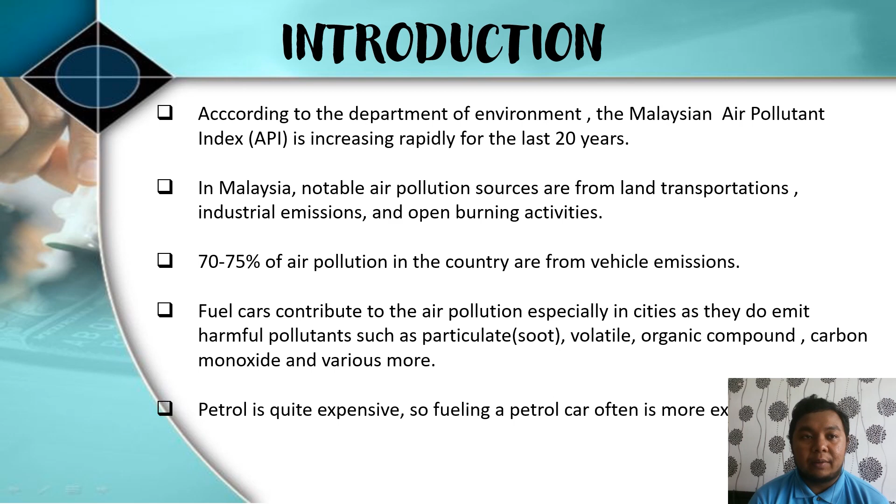Fine particulate soot threatens human health by penetrating into the lungs and will cause lung irritation and weakens our body defense against respiratory diseases such as influenza and COVID-19. Okay, regarding the problems that we faced during our discussion, firstly, we have to determine what type of material is suitable for making our chassis system, which is we have to use the strongest material as the body chassis.

And then the second is, as you all know, conventional three-wheel scooters are not environmental as they use a two-stroke Daihatsu engine and are very noisy in the street or in the cities. And lastly, usually three-wheel scooters with internal combustion engines are not energy efficient as they use fuel, and as fuel is not a green source of energy, that makes them not as efficient. Two-stroke engines emit high soot emission. By converting to electric, there will be no tailpipe emission. Running on electricity will reduce the carbon dioxide emission by 60% compared to running on petrol.

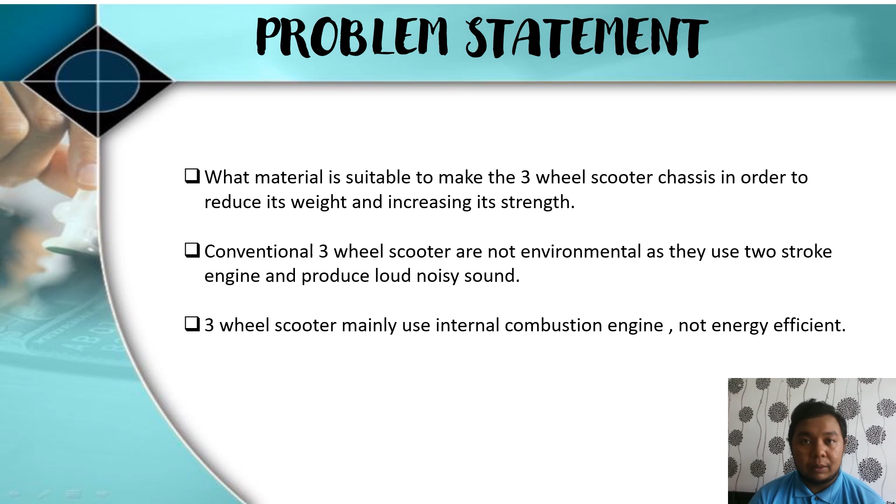Okay, regarding the objectives, firstly, we want to determine the most suitable material used to develop the chassis. We select the best material that can give low cost but high quality. Secondly, we want to design and fabricate a high-quality custom three-wheel electric scooter chassis by joining a go-kart chassis and a motorcycle fork within 14 weeks. And lastly, we want to test the operation of the electric scooter chassis functionally using a brushless motor powered on the road from 0 until 20 km/h. That is our target.

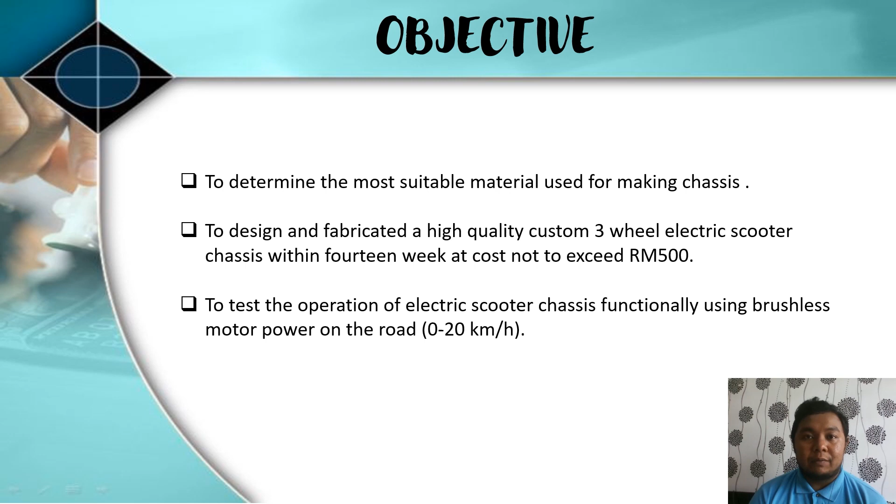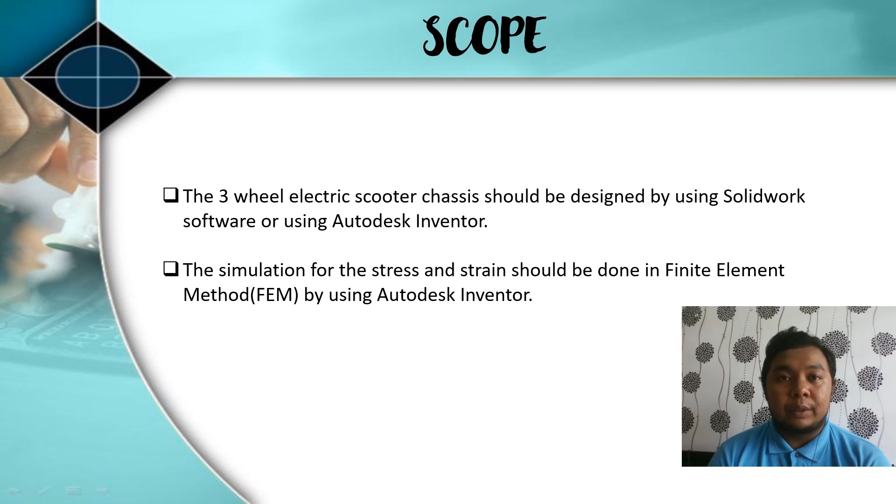And then for the scope of the project, firstly, the three-wheel electric scooter chassis must be designed using SolidWorks software or Autodesk Inventor. Basically, our group has done this part using SolidWorks software, and it will be shown in the sketching later. Next, we will run the simulation for the stress and strain in finite element method (FEM) using Autodesk Inventor, Nastran or SolidWorks. This FEA analysis is important to obtain information on the highest stress and strain on each part of the chassis.

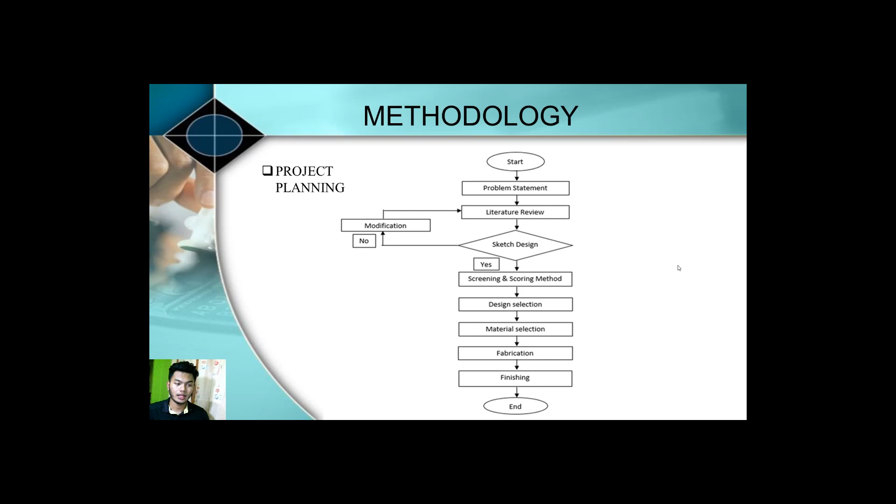For our project, the duration is 14 weeks, and this is the detail of the project. Week 1 we create a group, week 2 we select a title, week 3 we do research on the title, week 4 until week 6 we produce the design ideas, week 5 until week 6 we select a design, and week 6 we discuss the material. At week 6 and week 7 we write the proposal, and at week 8 we present the proposal.

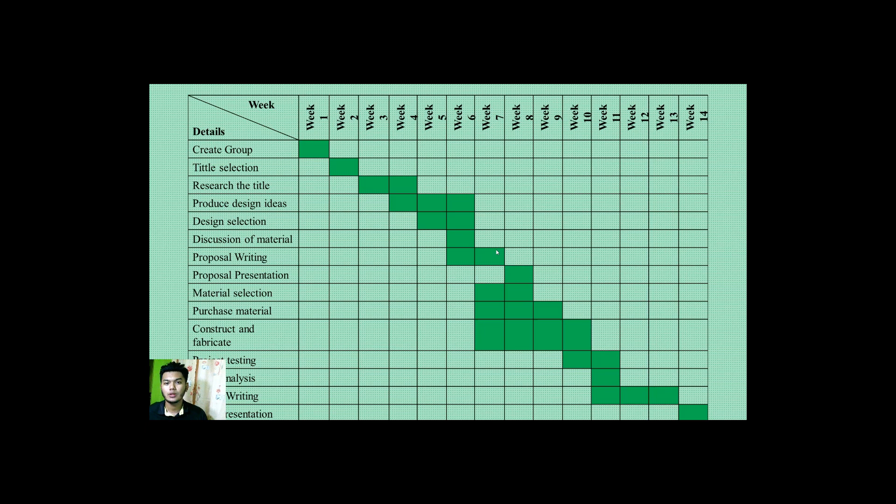At week 7 until week 8 we make a material selection, and week 7 until week 9 we purchase material. Week 7 until week 10 we construct and fabricate the model. Week 10 and week 11 we test the project. Week 11 we make an analysis. Week 11 to week 13 we write the report. At week 14 we do a final presentation.

Okay, next is the motor calculation. For the calculation of the DC motor, the most important value is the motor constant K. K is the combination of the stator size, winding, and the magnetic field. The torque and the angular speed or rotational velocity are related to K. This is the K formula, which is K equals NBLD. N stands for number of turns of wire on each tooth of the stator. B is remnant flux of the magnet. L is length or thickness of the stator. D is the diameter of the stator.

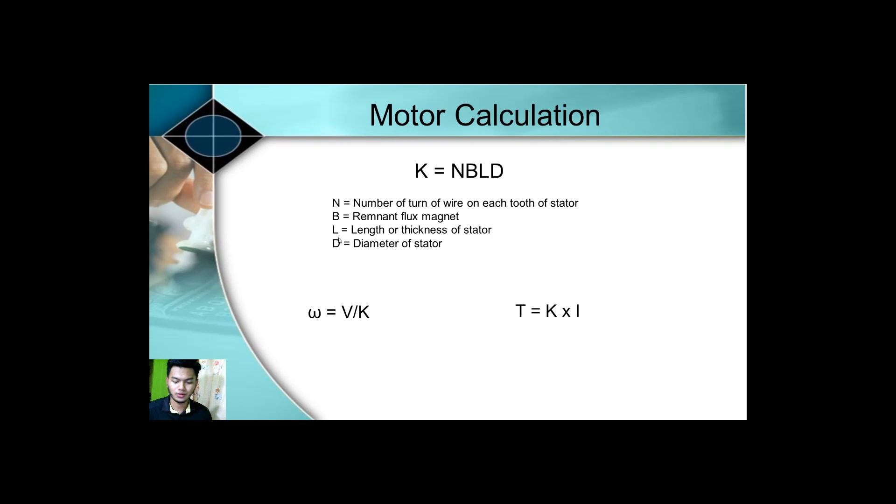After we get the value of K, we use this formula to find the rotational velocity, and then we can find the torque value using this formula: T equals K times I, where I is the current. In this case I can't find the value of NBLD, so we proceed with another calculation. I choose a motor ZY1016 with a power of 350 watt. The speed is 2750 rpm, and the voltage of the motor is 24 volt. Current is 30.5 ampere. The motor weight is 2 kg. So we can use the motor specification to find the angular speed and the torque.

We use the angular speed formula, omega equals speed times 2 pi over 60. So we get the value of 287.98 radian per second. Then we find the torque. Torque is equal to power over angular speed. The power we have here is 350 watt over 287.98 radian per second. So we get this value of the torque.

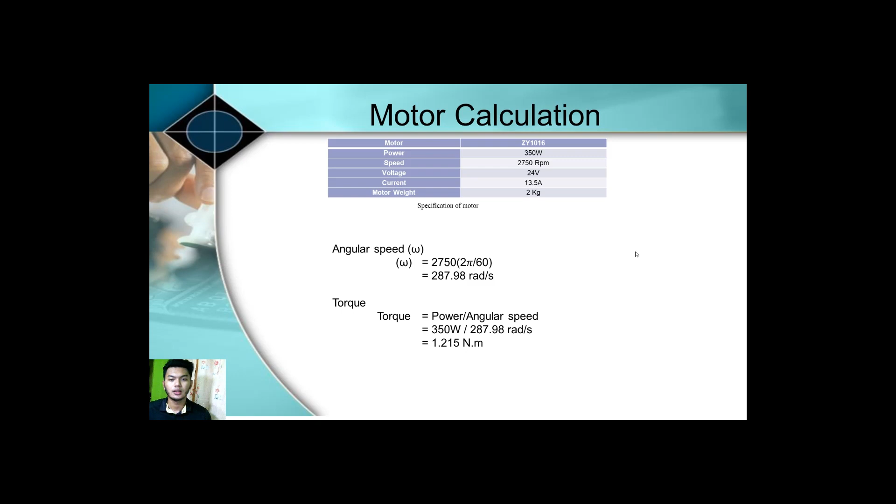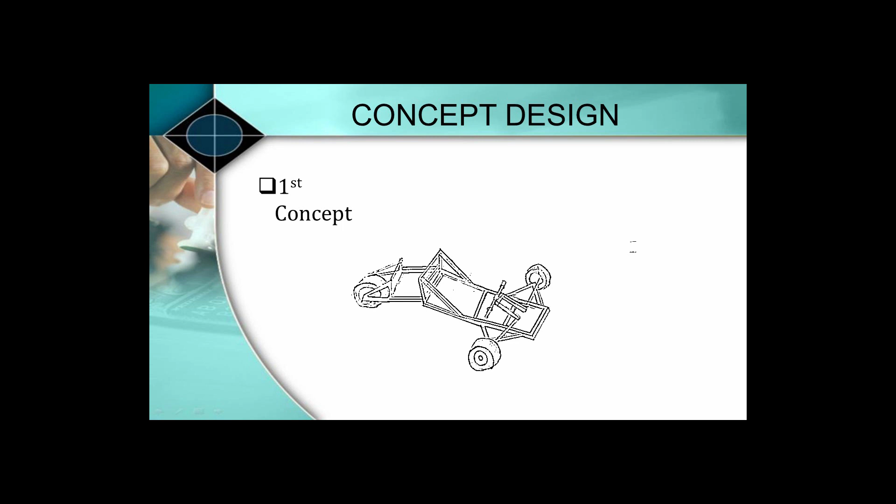The disadvantage of this concept design is it's harder to build because it uses more material. When we use more material, we will use more cost. So this concept design may not be suitable.

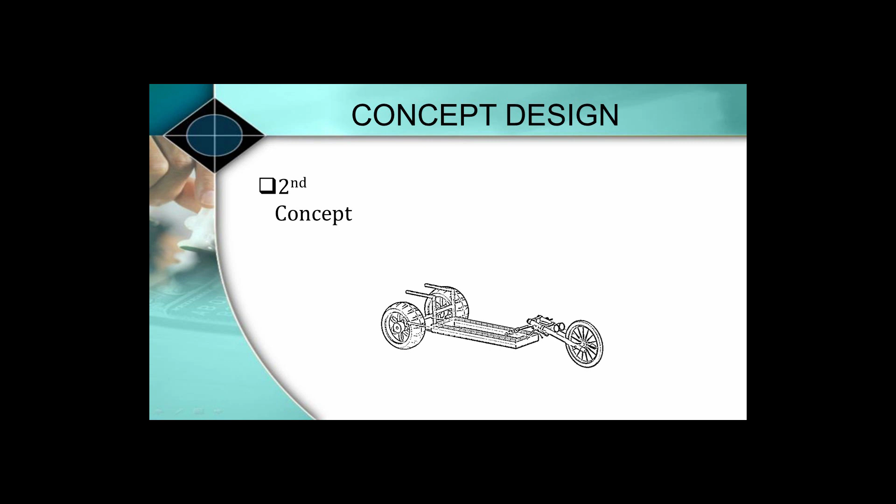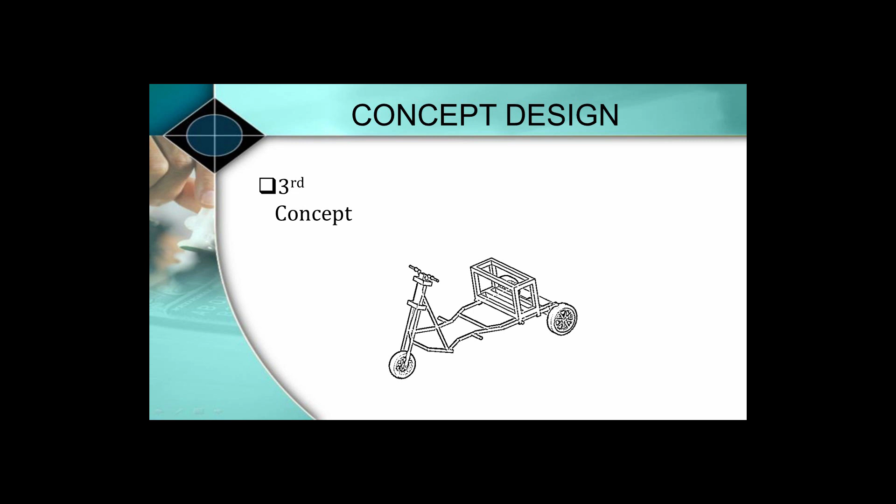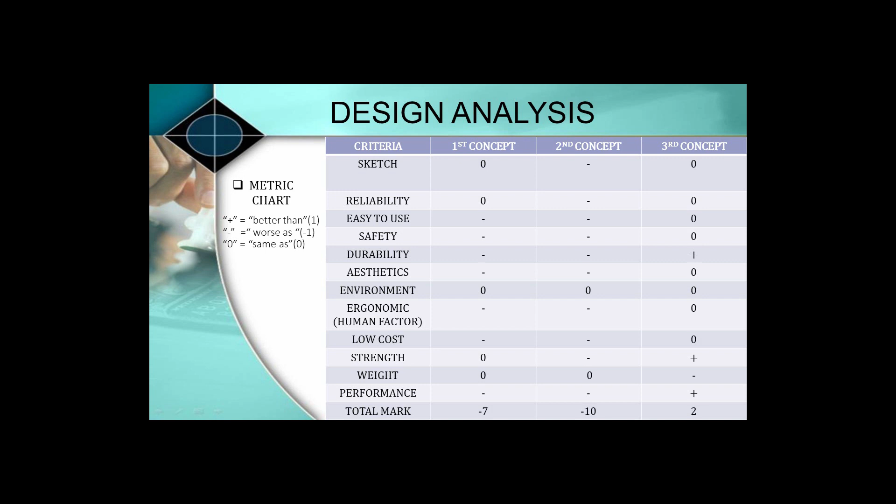At the end of the analysis, you can see the total mark for the third concept is the highest, which is 2. So we take our third concept design as our concept selection.

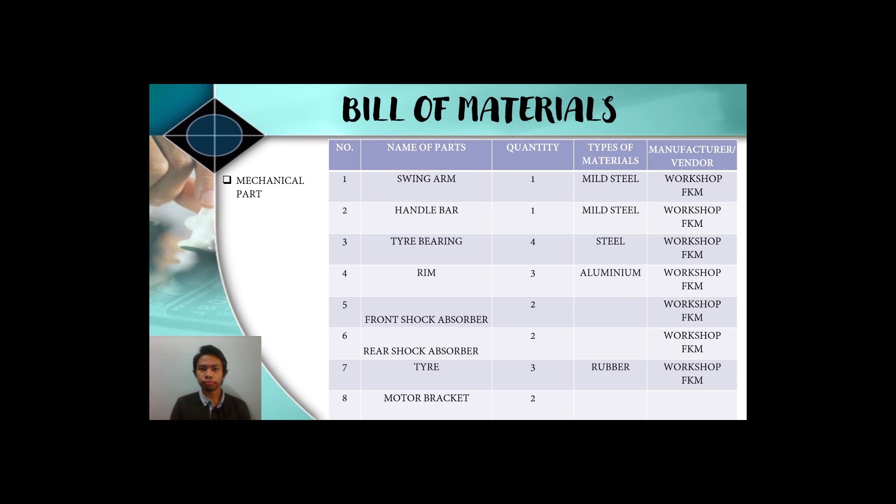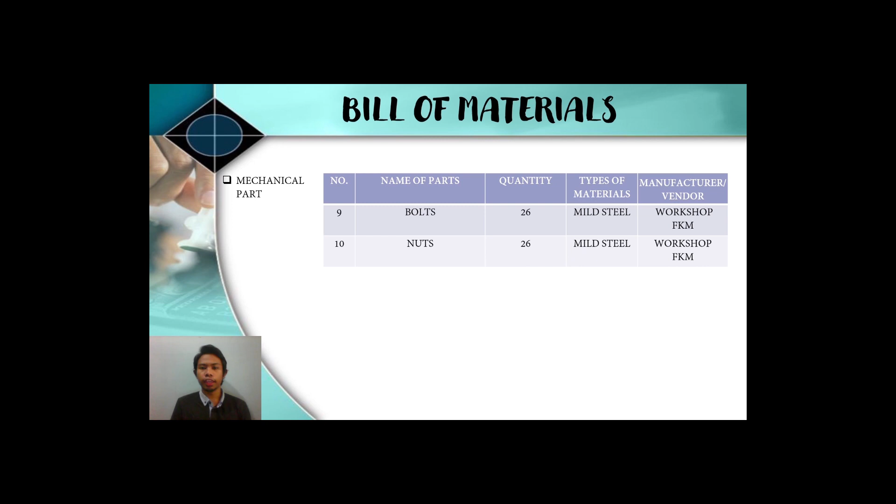Then is bolt. Quantity is 26 bolts. Type of material is mild steel. Manufactured at workshop FKM. The tenth and last mechanical part is nuts. Quantity is 26. Type of material is mild steel. Manufactured at workshop FKM. Now we proceed to the next part, design process.

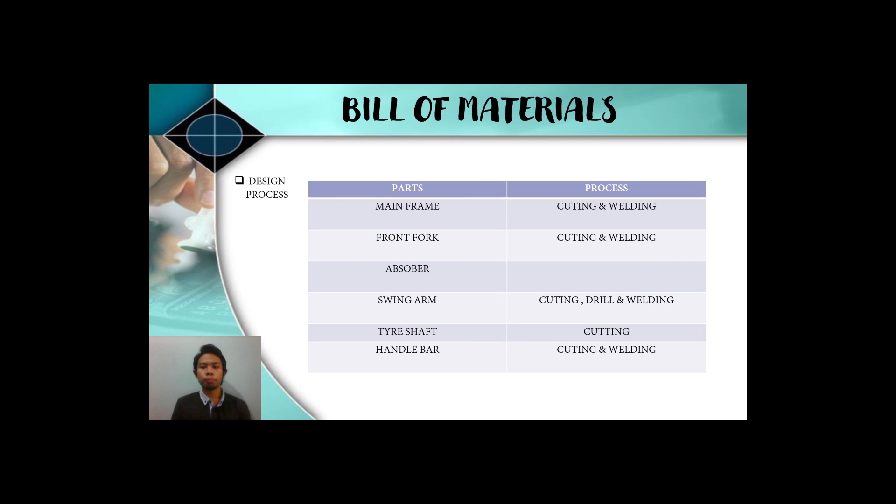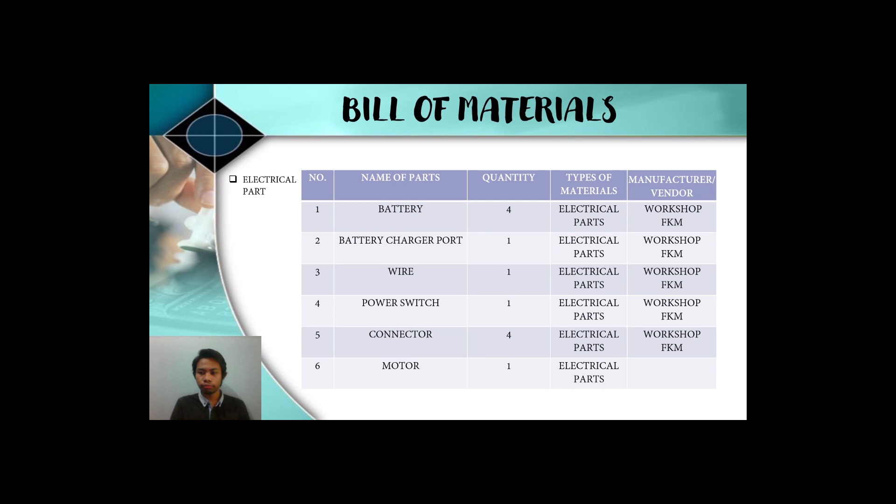Now I will proceed to the discussion. The third concept is selected as the final design for fabrication and simulation. There were many errors and problems during this project to get a simulation of the model. Based on the matrix charts from the finalized concepts, design concept number 3 has the highest rating of effectiveness. The third concept is selected as the final design for simulation and fabrication.

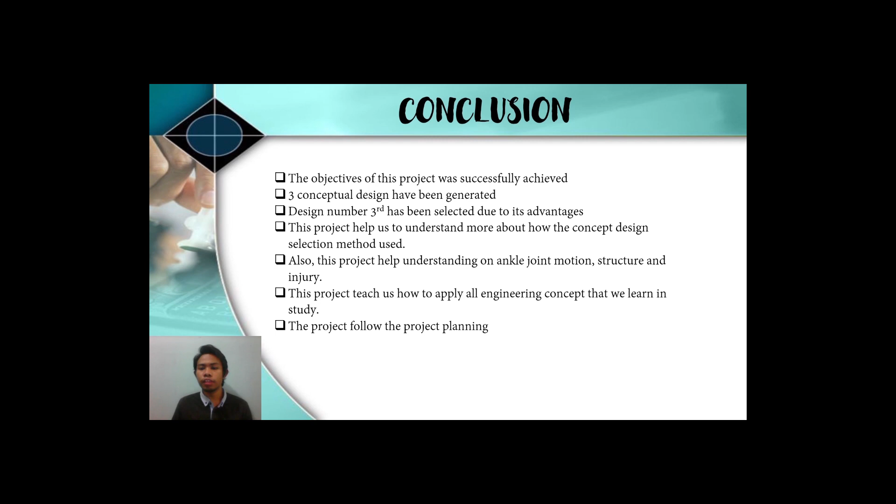For conclusion, the objective of this project was successfully achieved. 3 conceptual designs have been generated. Design number 3 has been selected due to its advantages. This project helped us to understand more about concept design selection and also the methods used. This project gave understanding on ankle joint motion, structure and injury. This project taught us how to apply all the engineering concepts that we learn in our studies. The project followed the project planning.